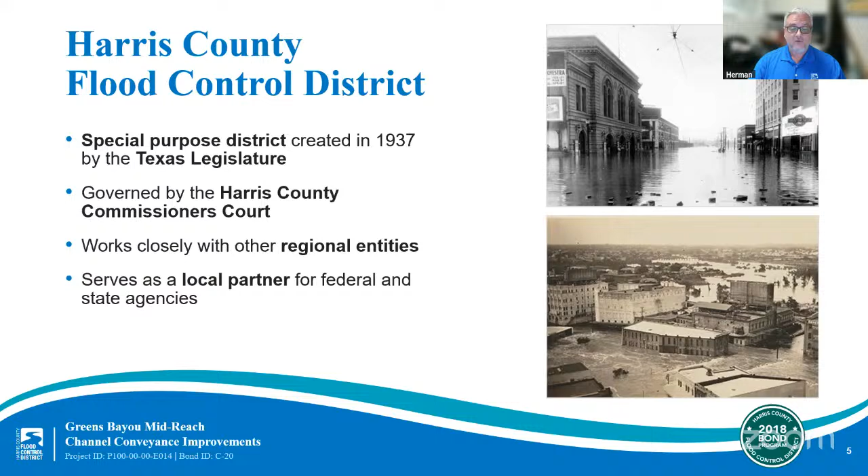The Flood Control District is incredibly unique in its mission. In addition to the unincorporated areas of Harris County, we also have 32 municipalities within our boundaries. Our agency can partner with these other cities, precincts, and local agencies to work together on flood risk reduction projects at both the local and regional level.

So, not only do we plan and implement new projects that expand and improve our drainage network, but we also have maintenance teams working day in and day out to keep our bayous and channels ready when the next storm hits. In fact, it's built into our mission to plan, implement, and maintain flood risk reduction projects guided by community and natural values. That last part, guided by community and natural values, is so central to who we are.

And it's also one of the most difficult challenges we face. Building projects that not only reduce the risk of flooding, but also respect the needs of the community and the environment, especially in a highly urbanized area such as Harris County. That's why your input at meetings like this matters so much.

I'm sure it's safe to say that everyone joining us tonight probably knows that Harris County is prone to flooding. But why? Not only do we have extreme rainfall events like tropical storms and hurricanes, but our land is flat, which means stormwater often moves slowly when making its way to bayous and channels. In most parts of the county are clay soils that don't absorb stormwater quickly. Instead of being absorbed, stormwater just collects on the ground, creating a pooling effect, thereby increasing the risk of flooding.

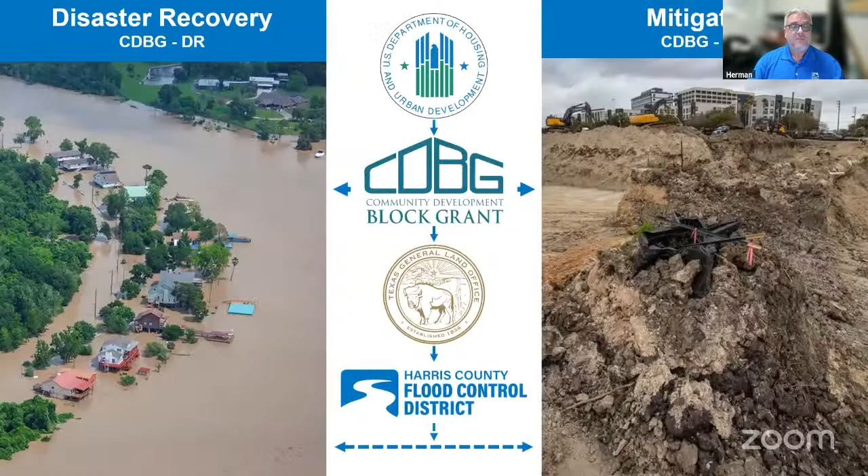Now I'll share a little more information on the total cost and funding partners for this project. First, the estimated total project budget for the entire Greens Mid-Reach project charter is about $155 million. I want to highlight one funding partner for this project, and it's the U.S. Department of Housing and Urban Development, also known as HUD. The Community Development Block Grant Disaster Recovery Program is one of the funding programs under HUD. Disaster recovery funding is focused on projects helping communities with long-term recovery after a federally declared disaster.

Hurricane Harvey, which hit Harris County in 2017, is the federally declared disaster that allows the Flood Control District to apply for the disaster relief funding. The Texas General Land Office, or GLO, administers the grant program at the state level for HUD. This means the GLO distributes funds to local, county, and state agencies that apply for and are approved to receive funding for projects benefiting areas directly impacted by Hurricane Harvey. The Flood Control District has been awarded approximately $322 million for projects meeting the funding program's requirements.

The Greens Mid-Reach project is receiving $46 million in CDBG disaster recovery funding. This project's service area was determined to benefit households where at least 50% of the population meets the federal classification of low to moderate income. All Flood Control District projects receiving CDBG disaster recovery funds must be completed by February 28, 2027.

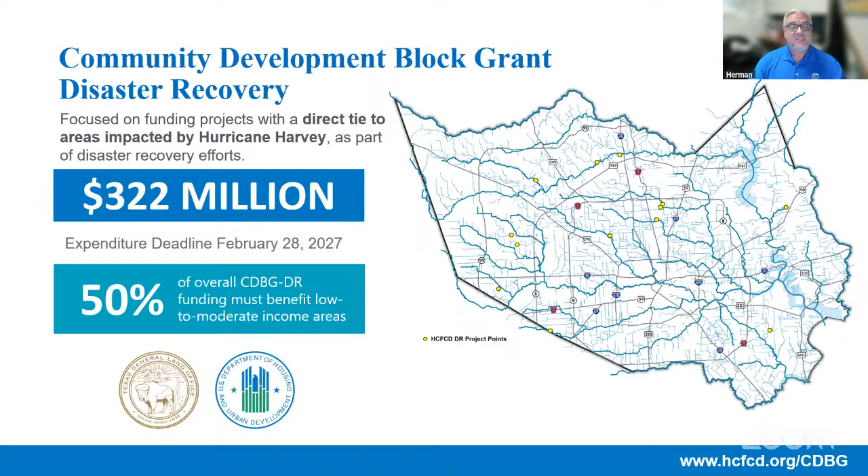I previously mentioned several sources that fund projects by the Flood Control District. Let's take a look at each of the funding sources for this project. First, after voter approval of the 2018 bond, the Flood Control District initiated bond ID C-20 for this project. The 2018 bond program allocated $20.7 million for this project for preliminary engineering and design efforts. As we mentioned, we also secured $46 million in a Community Development Block Grant through the disaster recovery program. The current estimated project budget for the first segment of the recommended alternative is about $40 million. All non-CDBG funding sources must be applied to this project prior to our ability to utilize CDBG disaster recovery funds.

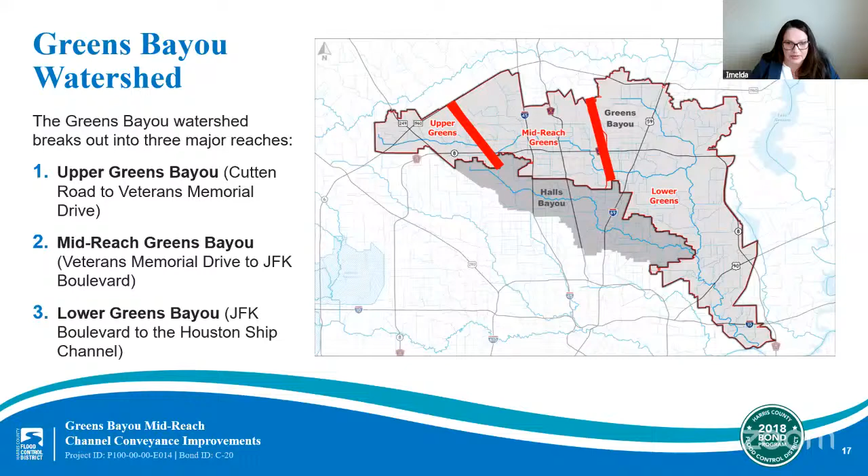There are additional steps required prior to starting construction, but we anticipate breaking ground on this project by the second quarter of 2026. We'll talk more about the next steps in a few minutes, but first, let's take a closer look at the project area and the recommended design.

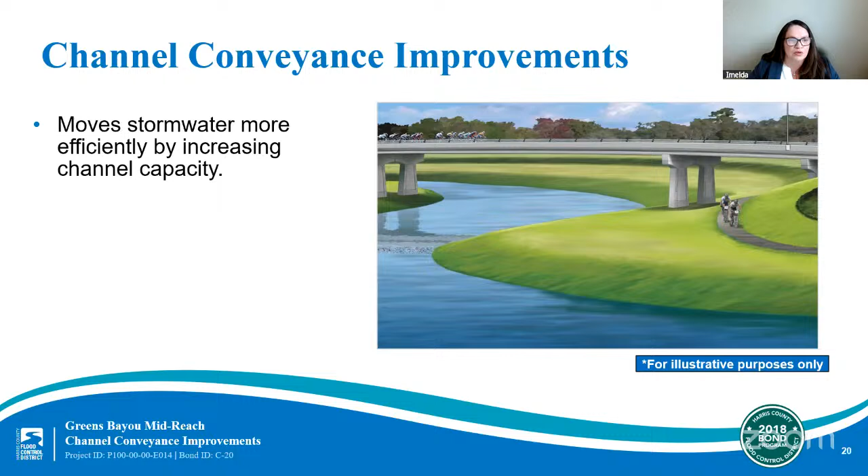We also want to point out that the Greens Mid-Reach project will be mitigated by 5 large stormwater detention basins. 4 of the 5 stormwater detention basins have already been constructed and include the Kuykendahl, Glen Forest, Aldine Westfield, and the Lauder basins. The 5th basin, the Hardy Stormwater Detention Basin, is currently in the planning stage. As mentioned before, the Flood Control District is a no adverse impact agency. That means we do not allow our projects to reduce flooding risks for one area while increasing the risks somewhere else.

That's why stormwater detention basins are often built before or at the same time as channel conveyance improvements to prevent any unintended impacts downstream. So first, we create an area to allow us to store the excess stormwater. Then we find ways, such as channel widening, to move the rest of the stormwater out of the area even faster.

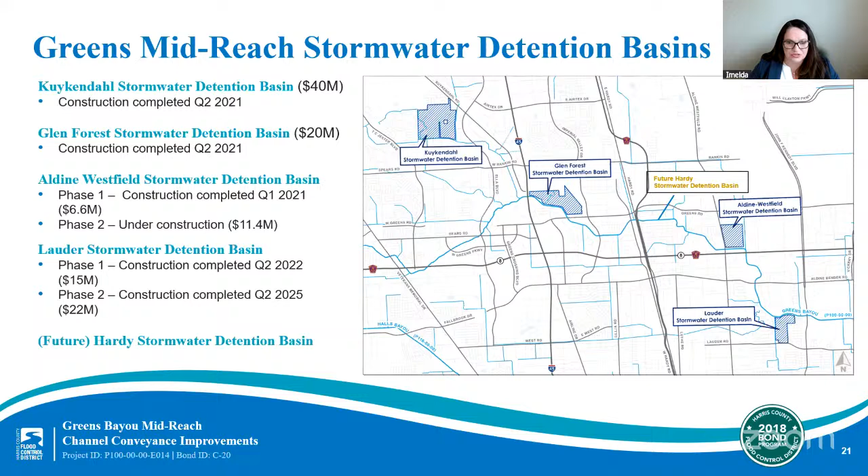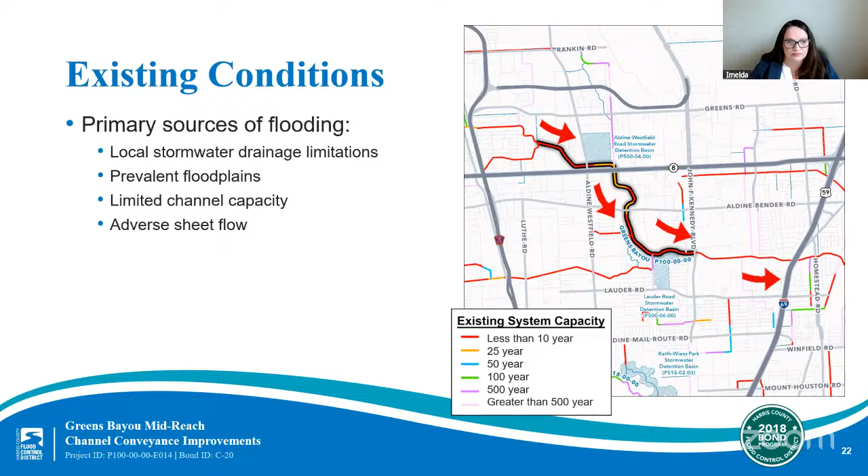I want to take a few minutes to cover another term mentioned earlier. Throughout the presentation, we will be using terms like 100-year event and annual chance event. I want to clarify what that means. So a 1% annual chance event or 100-year event is a rainfall event that has a 1% chance of occurring in any given year. That doesn't mean that if you have a 1% annual chance event this year, you are good for another 100 years. It is simply a measure of the expected frequency based on the historical data that we have.

I think it is important to remind you that the precipitation depths for each of the specified frequencies are based on statistical data, and they are not related to each other. For instance, a 10-year event does not have 5 times as much rainfall as a 2-year event. And a 100-year storm does not have 10 times the rainfall of a 10-year storm.

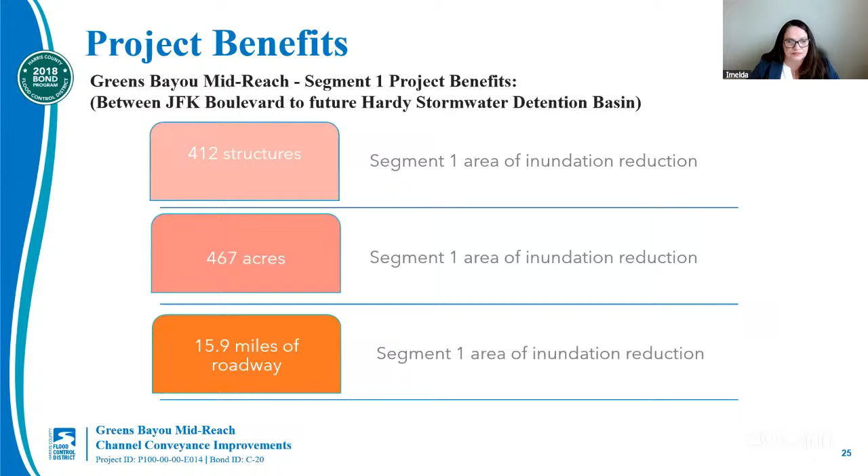When we say water surface elevations decreased, we mean that if a particular storm event occurs today, it will cause the channel to rise to a specific level before the project is completed. But after the project is completed, that same specific storm event would produce a water level in the channel that's lower than before. So that flood risk to homes and people is now lower.

Overall, the benefit area of the project is estimated to reach more than 7,000 people who live near the area. This total does not include the benefit of people who commute throughout the area every day, which would further increase this estimated total benefit.

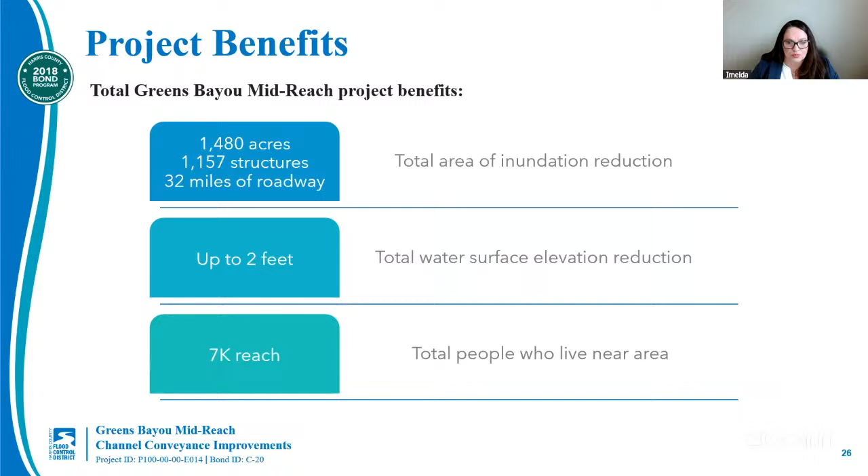Now that I have provided an update on the current design and the project benefits, let's take a look at the outlook for the Greens Midreach project and our next steps. When following a project life cycle, after the design stage comes the construction stage. As part of our standard practice, the Flood Control District will advertise the project for bids. We anticipate this happening in the first quarter of 2026. After the bids are received and reviewed, the contract will be awarded after approval from Harris County Commissioners Court.

So based on our current timeline, we anticipate construction to start on the first segment of the Greens Midreach project by the second quarter of 2026. If everything progresses according to plan, construction for the first segment could be completed by the first quarter of 2027. We do not currently have a timeline for segments 2 and 3, but as details become available, we will provide an update to the community.

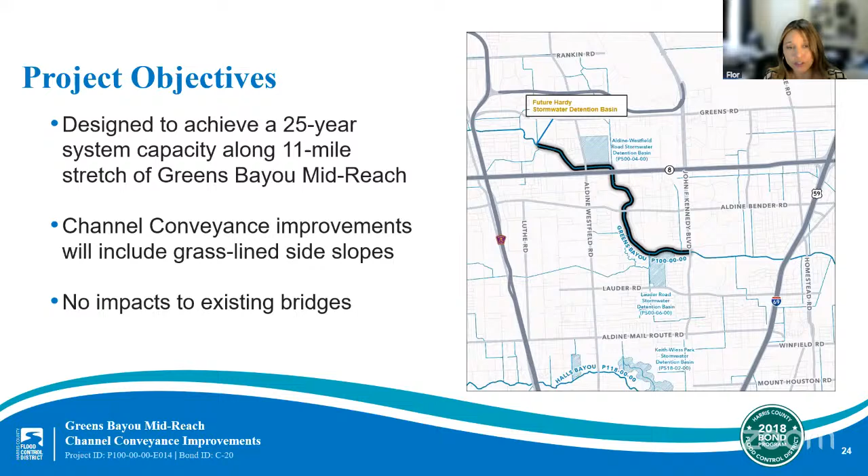Thanks, Flor. Our next question is for Samson. Samson, this was also touched on during the presentation, but can you talk a bit more about the funding sources for this project, please? Sure. This project is a great example of how we fund projects with multiple funding sources. Sometimes it's difficult to convey the scale of the projects or the scale of the need for flood risk reduction projects and how that translates to some substantial costs. So when we look to find funding sources, we often have to seek multiple partners. The Greens Bayou Midreach project is being funded by multiple sources, including $46 million from the Community Development Block Grant Disaster Recovery Program and approximately $12 million from the 2018 bond program.

All right. Thanks, Samson. Our next question is for Yusuf. Yusuf, let's take a chance to highlight one of the questions that we usually get asked by residents. What are the anticipated benefits of this project? Sure. The overall Greens Bayou Midreach project is estimated to remove the 100-year floodplain from more than 1,000 structures. If you go to the next slide. And additionally, the 100-year floodplain will be removed from approximately 32 miles of roadway and from more than 1,400 acres in the project area. So what that means is that during a heavy rain event, the channels won't get as overwhelmed as they might without the project.

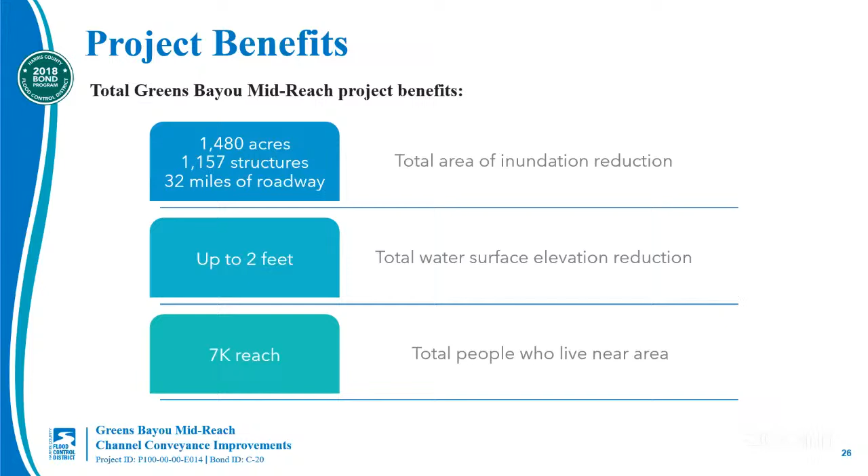Thanks, Yusuf. And Imelda, Dalia is asking how to receive this information in Spanish. Can you answer her question in Spanish, please?

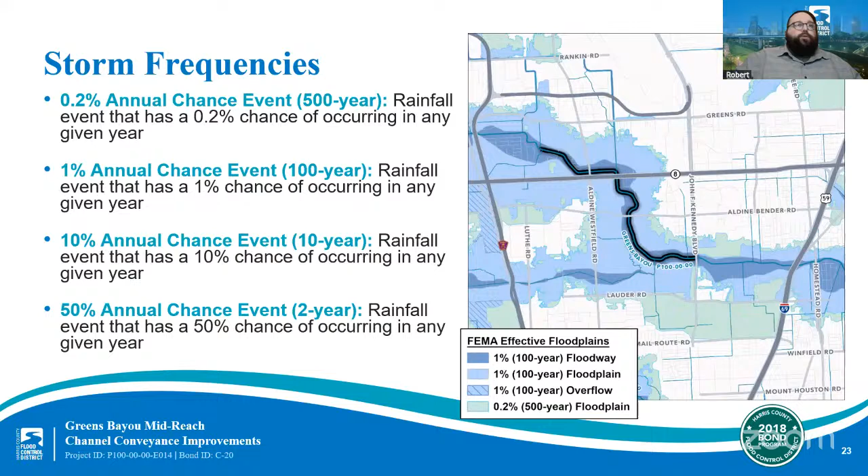Thank you, Imelda. Our next question is for Samson. Samson, earlier you mentioned the term 100-year storm event, and this is a frequently asked question by the news media and Harris County residents, especially after our area received a lot of rain in a very short period of time. What classifies as a 100-year storm or a 500-year storm? It sounds like those rainfall events should only happen once in 100 years or 500 years, but that's not the case. Can you elaborate on that, please, Samson?

Sure. So the term 100-year storm event is often misunderstood to mean that it can or will only occur once every 100 years. In actuality, a 100-year storm event has a 1% chance of occurring in any given year, and a 26% chance of occurring during a 30-year period of time. On the other hand, a 500-year storm event has a 0.2% chance of occurring in any given year.

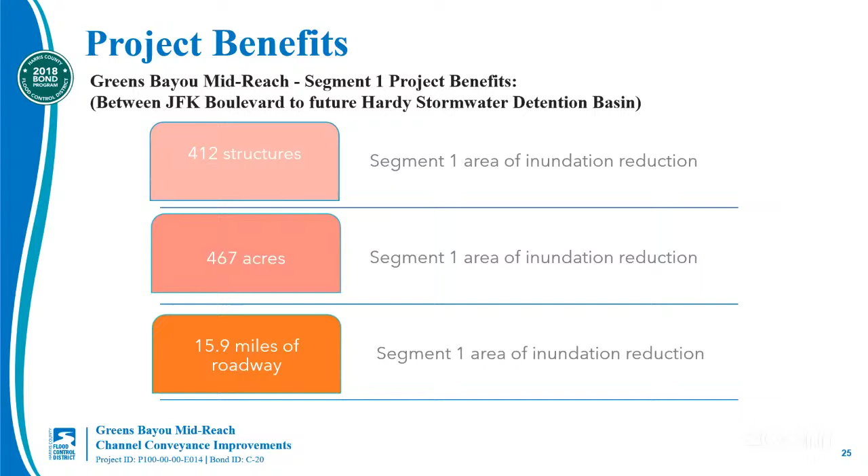All right. Thank you, sir. And also sticking with you for this question, Yusuf, can you tell us again what the next steps for this project are real quick? Yes. So from here, the team will review public feedback from this meeting and will finalize the project design. And then after that, we expect that the design plans will be transmitted to Harris County Commissioners Court by the end of the fourth quarter of 2025.

And the team will next advertise for bid the construction of segment 1 in the first quarter of 2026. And based on our current timeline, we anticipate construction to start on the first segment of the mid-reach project by the second quarter of 2026. And if everything progresses according to plan, construction for the first segment could be completed by the first quarter of 2027. Thank you.

Thanks, Yusuf. Our next question is for Samson. Samson, can you go ahead and please describe the Flood Control District maintenance and upkeep responsibilities associated with this project? Yep, generally speaking, mowing, debris removal, and vegetation management are the responsibility of the Flood Control District. We mow the majority of the channels and basins 3 times a year during the growing season.

However, sometimes a municipal utility district or homeowners association chooses to enter into an agreement with us where they take on the responsibility of additional mowing. And if a recreational sponsor chooses to build and maintain a recreational amenity on Flood Control District property, mowing may be part of that agreement as well, if appropriate. All right. Thanks, Samson.

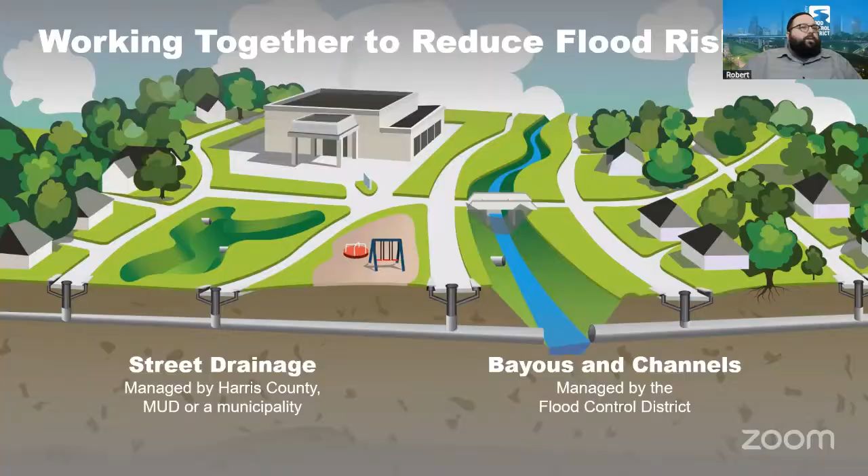Flor, another question for you. Harris County is flood prone as a region based on several factors that Shannon mentioned in the presentation. Flat, slow draining land, clay soils, tropical storms, or just heavy rainfall in general. Will this project protect area residents from future flooding in this area?

Thank you, Rob. That is the $1 million question. It is impossible to say that one project will completely eliminate flooding in the area. This project will reduce the risk of flooding in the area, but the risk of flooding will remain. And for that reason, the Flood Control District recommends that everyone in Harris County and surrounding areas purchase flood insurance policies.

It's important to say that one project cannot completely eliminate flooding in an area. This project will reduce the risk by storing excess stormwater during heavy rain events instead of overwhelming the channel, but the risk of flooding will always remain. That is why we recommend everybody in Harris County and surrounding areas purchase flood insurance policies. Thank you, Flor.

So our next question is for Yusuf. Yusuf, Patsy is asking, will all 3 segments be completed by first quarter 2027? Hi, Patsy. Thank you for your question. Sorry for the confusion, but no, the first quarter 2027 completion, that's just for segment one. Hope that clears it up. Thank you. All right. Thank you, Yusuf.

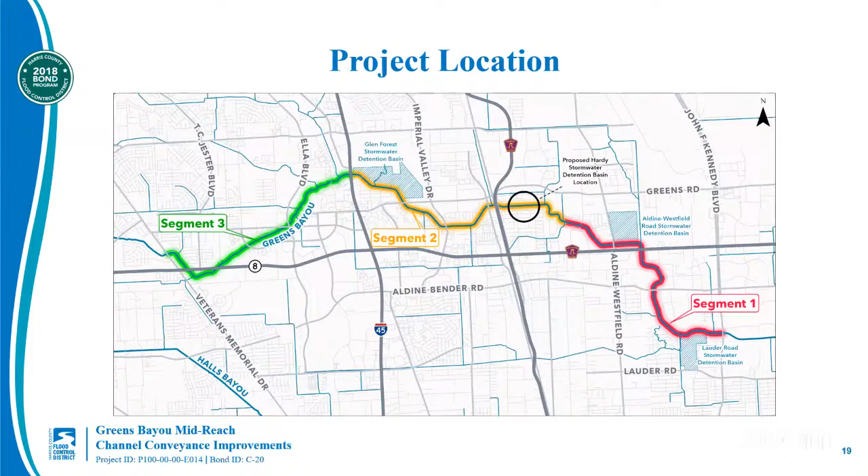And so the first segment of the overall Greens Bayou Midreach project, which is shown in red, is where we'll construct the channel conveyance improvements. That'll be the first project. So again, that segment one project will be from JFK Boulevard to just east of that future Hardy stormwater detention basin. Thank you. All right, thanks, Yusuf.

And Samson, switching back to you for this next question. If we are reducing flooding in this area, are we just flooding another area as a result or not? The Flood Control District is a no adverse impact organization. This means that the Flood Control District does not create projects that will negatively impact any other areas.

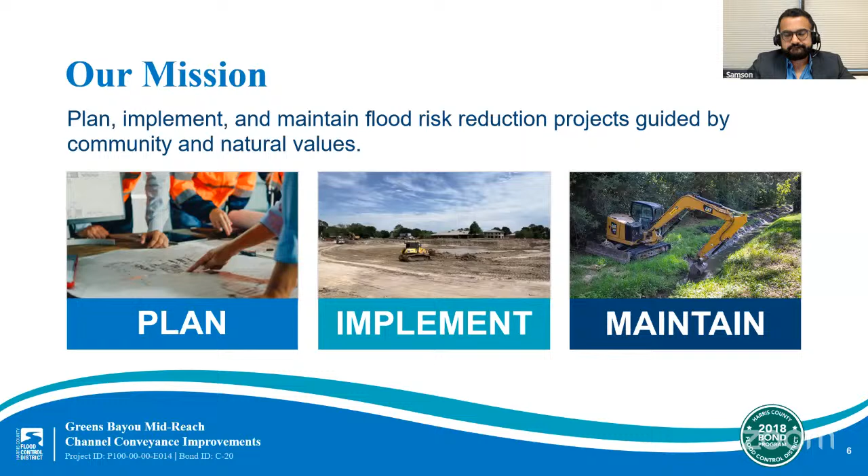All right, thank you. And for the whole panel here, do we have an estimate on when all three segments might be completed? Anybody who wants to take that question? I could take that question unless Emily wants to chime in, but right now we only have funding available for the first segment. And then the additional segments, we are moving forward with completing the revised models for the second and the third segments, but at this time there isn't full funding for the remainder of the segments.

All right, thanks, Imelda. Next question is for Floor. Floor, this is the big question that we always get asked. Why can't the Flood Control District eliminate flooding altogether? Thank you, Rob, for that question, and for everybody that's interested in this. Although all of the projects in the Greens Bayou will reduce the risk of flooding in the area, the risk of flooding will always remain.

The Flood Control District recommends that everybody in Harris County and surrounding areas have flood insurance to insure against the possibility of personal and financial loss. Please visit www.hcfcd.org/mapnext. That's MAAP next, NEXT, to learn about the Flood Control District's MAAPnext initiative, which aims to produce Harris County's most comprehensive and complete set of flood hazard maps and information. Thank you. I hope that helps.

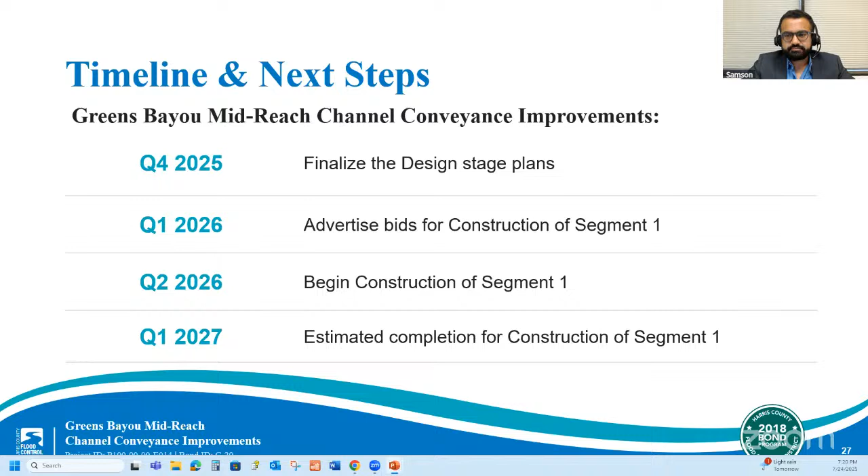All right, one second. Oh, thank you, Samson, by the way. Let's see. We do have one question that just popped in. Richard Cantuz asks, will there be any recreational amenities, hike and bike trails along the channel or within the Aldine Westfield Basin or Hardy Basin? Can anybody answer that one particular question?

I could take that one. Okay. So the Flood Control District cannot construct any type of recreational amenities such as hike and bike trails, but we do try to design the projects where it is easy for sponsors to come in and lay trails along the channel with approval from the District, of course. All right. Thanks, Imelda.